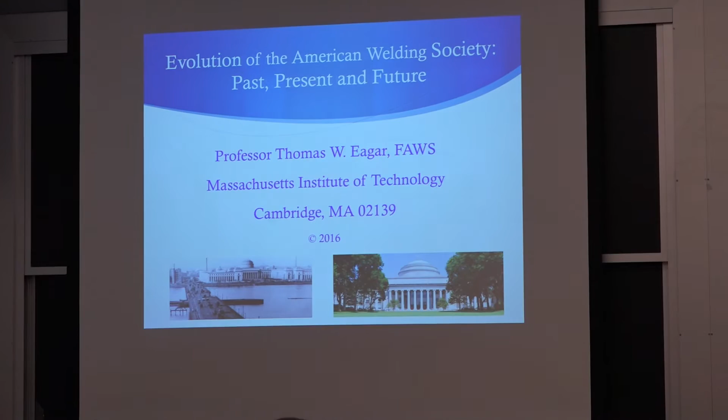why joining is important. So it turns out I'm at MIT, and this is MIT today. This is just about exactly 100 years ago. We're sitting over here in this little building. MIT moved across the river into Cambridge from Boston 100 years ago last month.

So it turns out if we look at welding, welding is a foundation to all the manufacturing that we do, all the products, whether it's micro components or huge ships or other things. It's important to our security, and it's also important to our comfort.

If we look at needs of different people - well, before I do that, this is the outline of what I'm going to go through. I often use the U.S. Army's approach when they're teaching new recruits: first you tell them what you're going to tell them, then you tell them, and then at the end you tell them what you told them. Because they hear it 3 times, and then maybe they'll learn it the 3rd time.

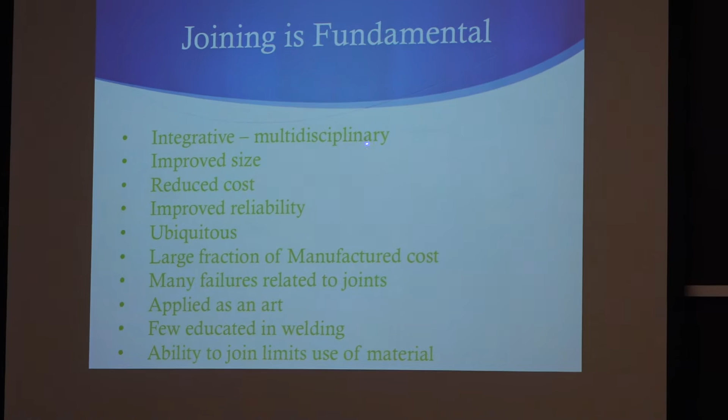Anyway, joining is fundamental. It's an integrative process that's multidisciplinary, using lots of different engineering fields of study. It's improved the size, reduced the cost, and improved the reliability of virtually everything we build.

It's found everywhere, it's ubiquitous. It's a very large fraction of the manufactured cost, which is one of the reasons it's important to our manufactured product. It's important to the quality of what we build. Many of the failures are related to the joints.

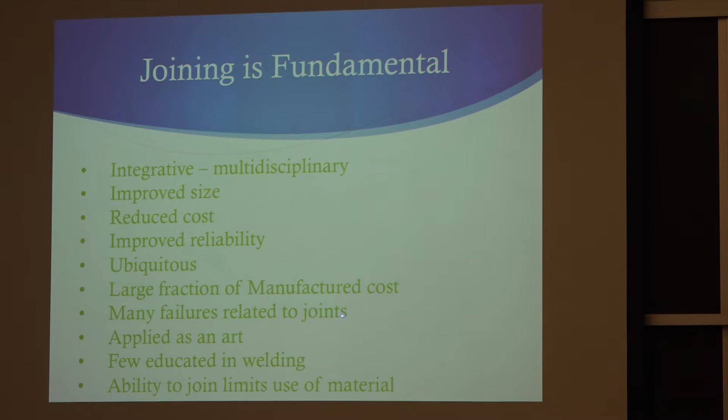It's often, almost always, first been applied as an art before we ever understood the science behind it. The science tends to follow the art in welding because of the great need to be able to join things. There are relatively few people in this country educated in welding.

We probably turn out 50 welding engineers a year in this country. In the Soviet Union, or former Soviet Union, they turn out about 5,000, okay? And you can actually see the difference in the way they do things in different countries because of the difference in the number of people who are actually educated in welding.

And the ability to join something, particularly new advanced materials, often limits the use of materials.

Now, one of the reasons we're doing things in general is because we're trying to fulfill some need, and it turns out the guy Maslow came up with a list of needs, a hierarchy of needs, a number of years ago, and joining is important because it fulfills some of our needs. So there are basic needs, which are the physiological needs of food, shelter, clothing, and safety, and then your psychological needs of esteem, love and belonging. And then there's the self-fulfillment needs where you actually can start worrying about the environment and all kinds of other things.

I remember once we had the World Economic Forum here at MIT, and I was chairing a session on the environment. And I had someone there who was Minister for the Environment - this was like 1992 or so - Minister of the Environment for the former Soviet Union.

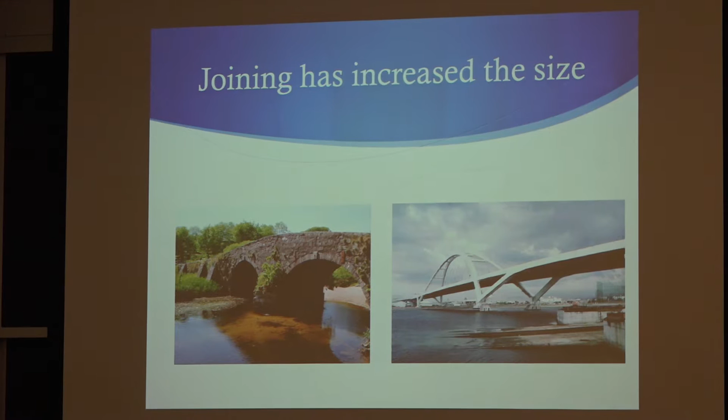Joining has increased the size of what we build. Here's an old bridge, I think in England, an old stone bridge, and you could go across small bodies of water. But today we have huge bridges, and it'd be hard to imagine how we would build something of that size without modern joining technology.

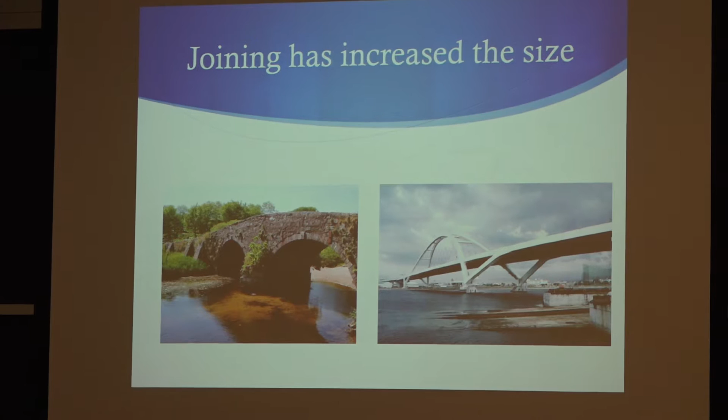What I really should have done is put together a picture of a pressure vessel. If you think of pressure vessels that now are 4 inches thick, can you imagine riveting a pressure vessel like that, 4 inches thick, with rivets? It would be nothing but overlaps, right? So because we have welding, we can make things that 100 years ago we couldn't make.

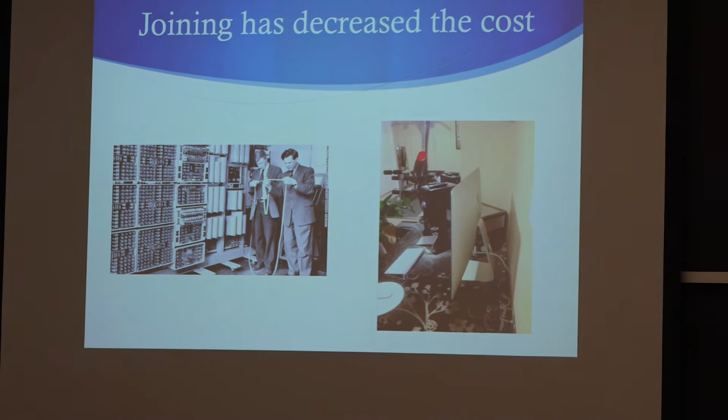It's decreased the cost of things, and so I'm using here a computer. Here's one of the old computers versus a new computer. What's going on there? Well, that's interesting. PowerPoint, Bill Gates knows what I want to do, I guess.

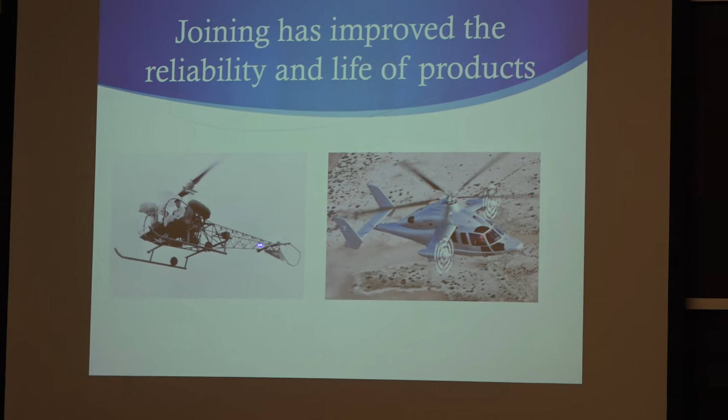Anyway, it's also improved the reliability and life of products. There's one of the early 1950s helicopters, a Bell helicopter. It's basically a very simple design, very light. It carries about 1 person, not much more. Actually, during the Korean War, it would carry 2 people, they'd have a stretcher hanging off the side. You may have seen that in MASH or something.

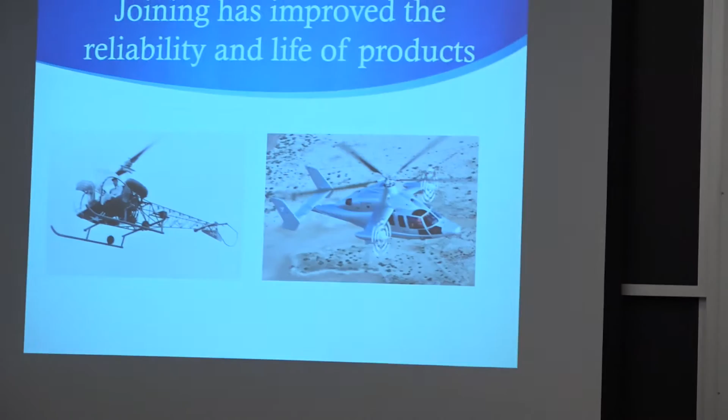Here's a modern Eurocopter that goes at like 230 miles an hour. And of course, we have the V-22 Osprey, which can go 300 miles an hour when you tilt the rotors forward. Does anybody know why helicopters are limited in speed? Because of the Mach drag caused by the advancement of the blade. Exactly. You don't want to go supersonic because you get forces that rip things apart. The advancing blade tip is actually getting to sonic velocity, and that limits your speed.

If you go down to Hampton, Virginia, to the NASA site, they have a picture of a helicopter that they put a jet engine on, basically a rocket engine, and forced it to go, with the tip speed going around, it would have to go supersonic, just to try it out. And some pilot who didn't really care about whether he lived or died flew it. Was it a jet pilot? Probably yes. I mean, well, those guys didn't care anyway.

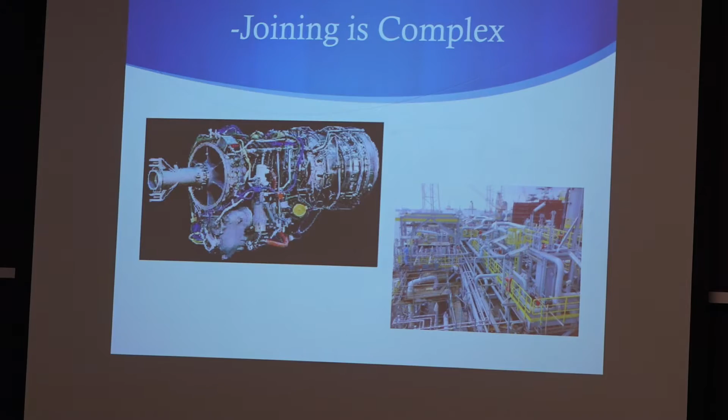Joining is also complex. This is actually the V-22 Osprey engine and drive shaft. It's pretty complex. I remember the first time I ever saw a V-22 Osprey, and I looked under the nacelle to see the engine. I said, wow, I've never seen anything that complex except the inside of a nuclear sub, in terms of everything going in every direction and crisscrossing. And this doesn't even show it fully—if you put it inside the nacelle with all the other things, it's even more complex than this.

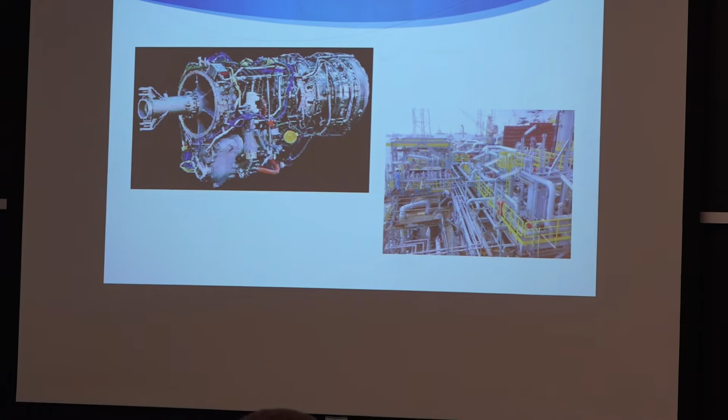It's fundamental to our manufacturing. It's foundational to what we do.

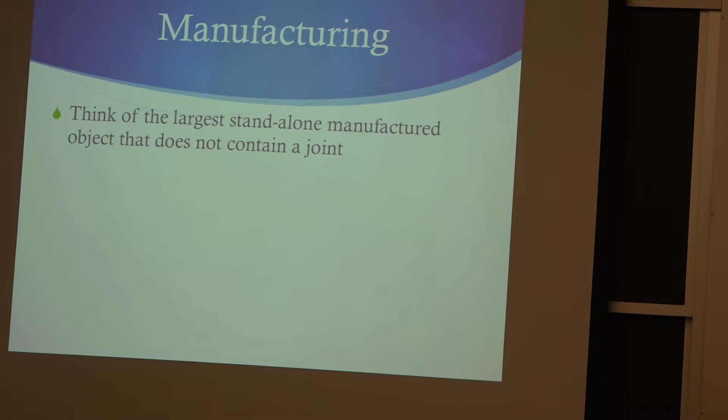In terms of manufacturing, I often, for many years, have asked students and others to think of the largest standalone object that does not contain a joint. So anybody have an idea?

I mean, people would say a nail or a needle. That's not very large, okay? I've gotten milk cartons, but even a milk carton's got to have a top, right? Maybe length of asphalt road. Except the asphalt road is actually a composite, so it's full of joints—you've got your aggregate and your asphalt, and those things have to stick together.

Ship propeller—if it's cast, yes, that's actually pretty good. Oh, an anchor? Yeah, an anchor. Although to make the whole thing functional, you've got to have it connected to a chain and things. I gave this challenge once to some faculty, and one came up with an anvil. But your ship propeller is pretty good in terms of a standalone object—I'd say it beats the anvil in many ways.

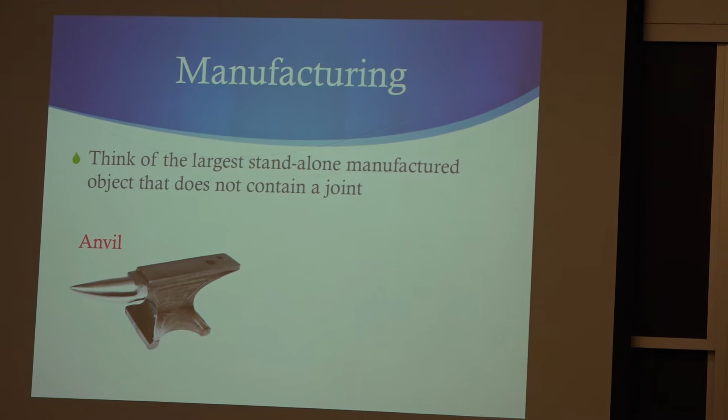That was Frank McClintock, who's retired now but was a faculty member of mechanical engineering. I mentioned this once to a bunch of faculty, and Frank fretted about this for like three days—what was the largest? Well, it turns out the largest depends on how you define it, but I call it a standalone object.

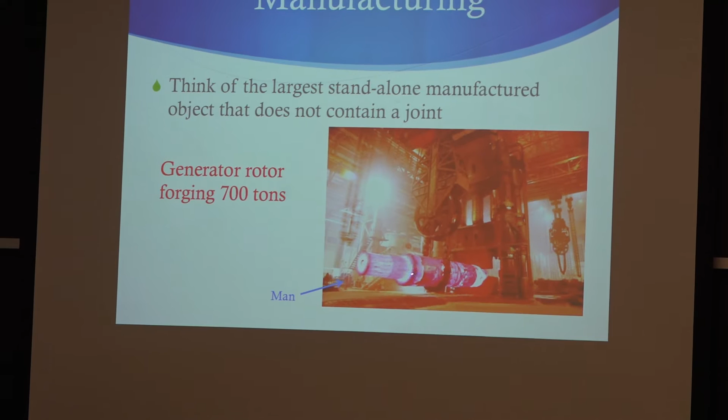The largest manufactured object that I can think of is a generator rotor forging, and it weighs about 700 tons. The forging gets machined down into a big long thing that will generate 1,000 megawatts of electric power. There's a man right there—so this is a lot taller than a man. It's about 10 or 12 feet tall and weighs 700 tons.

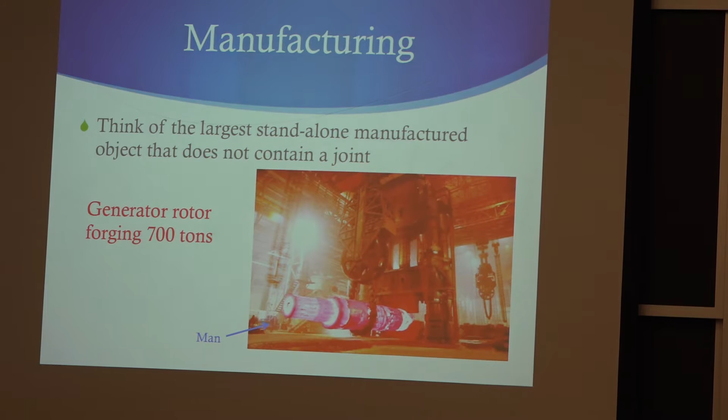But it's really just a big paperweight, unless—like your anchor, that was a good one—it's standalone, like the anvil, in the sense that you don't really need anything else to go with it. And the propeller's pretty good too. I actually came up with the largest in weight that I know of, which is an ingot mold for the generator rotor. It weighs almost the same amount as the generator rotor itself.

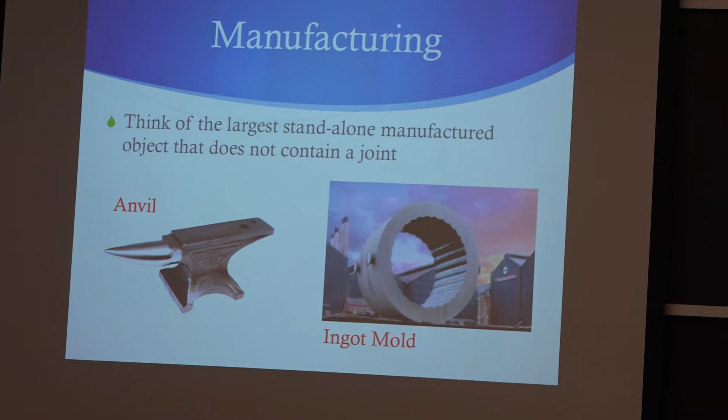By the way, when I was a young engineer at Bethlehem Steel 40 years ago, I was given the job of trying to weld two big forgings together because there was limited capacity in the world to make these great big generator rotor forgings. They'd like to make them even bigger if they could, but at the time they were estimating it would cost $1 billion to build a new facility to cast, heat treat, forge, and machine these rotor forgings.

It turns out Bethlehem Steel could turn out one a month, and U.S. Steel had a facility that could also turn out one a month. So we had the capacity to make 24 of these in the United States, and I think the French had a plant that could make another one. But you could only make so many, and people were projecting—this is the mid-70s—that electricity usage was going to outstrip all this, so we had to figure out how to get more generator rotor forgings without investing $1 billion in a new production facility.

So I was asked how you weld something with a cross section of about six feet by six feet—two big long objects with a cross section of about 36 square feet or so. Obviously I wasn't going to be able to do a whole lot of test welds because they get kind of pricey at that size. But in any case, where was I going with that?

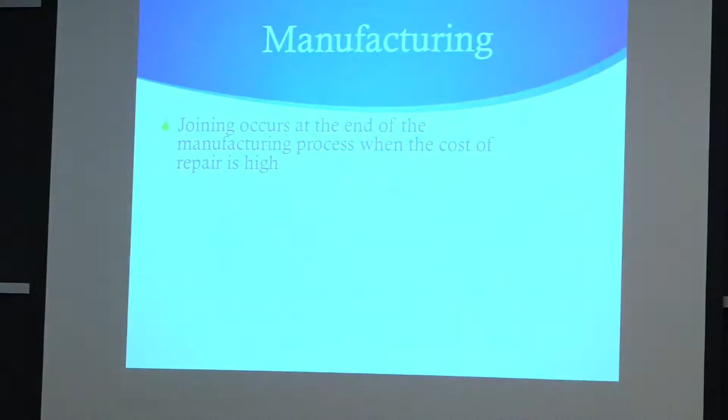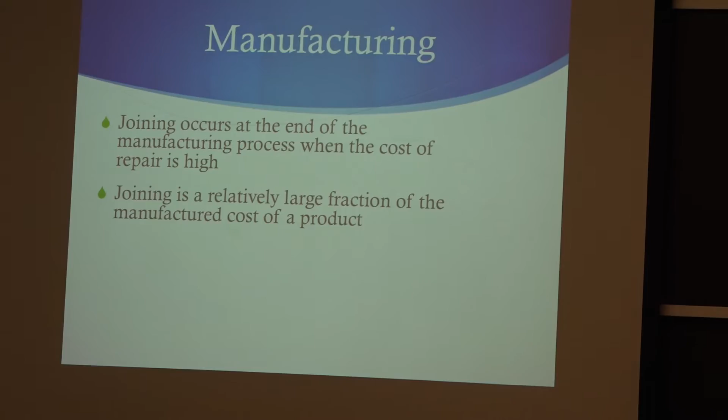Joining occurs at the end of the manufacturing process, where the cost of repair is high. Joining is also a relatively large fraction of our manufactured cost—typically 10 to 20% of the cost of a manufactured product. People say, well, that's only 10 or 20%, but the material cost is usually much less than 10%. So joining is actually a larger fraction than the actual cost of the material in most cases.

The inspection cost is about similar to the joining cost. If you take my course on material selection, I go through some of these things. It's actually in the handout you have on 21st century research needs—it breaks down what the fractions of manufactured cost typically are for something.

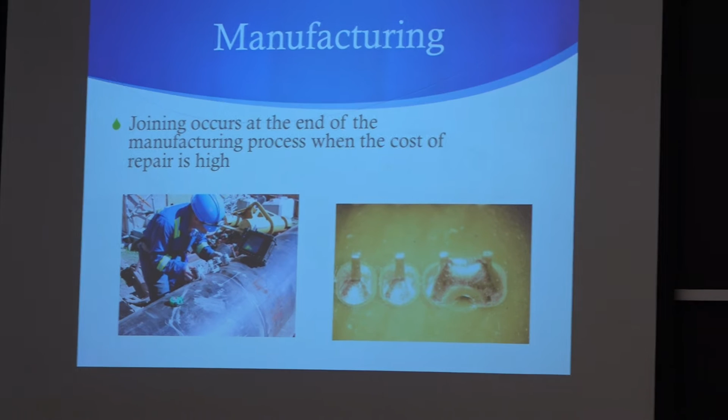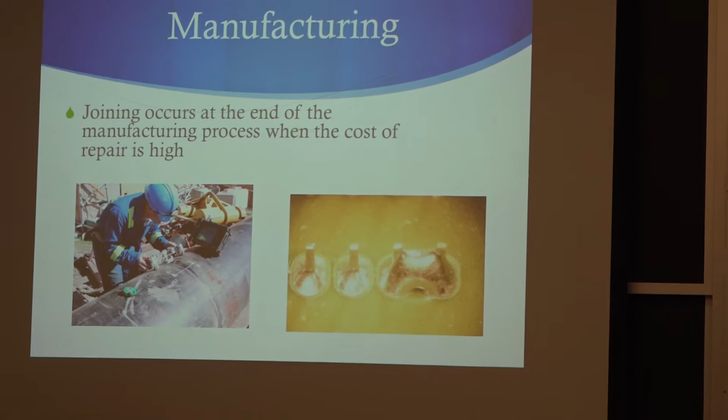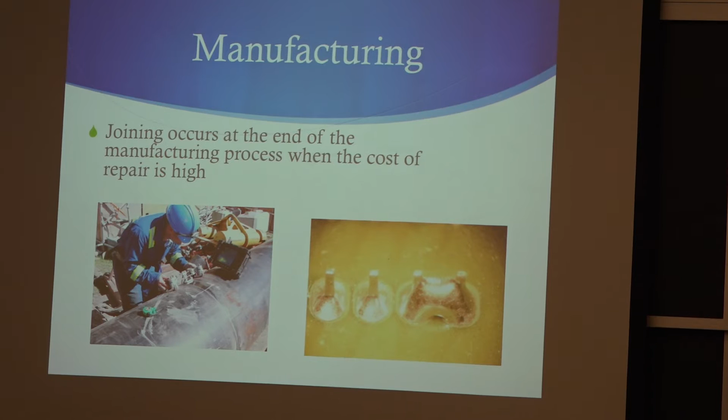So joining occurs at the end of the manufacturing process. We're talking about a big pipeline—we've already made the pipe, dug the hole, put it in there, someone's welded it, and someone comes along and inspects it. If it doesn't pass inspection, your whole project is delayed, and you're talking about a million dollars a day in delay time. If you're looking at a printed circuit board with solder joints, one bad solder joint out of 10,000 joints can destroy the whole project, and you've got to go in there and fix it individually. So rework is often a problem.

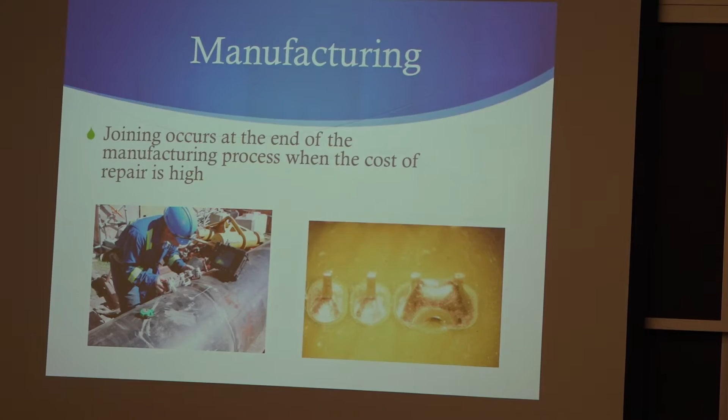Now, it's actually easier to do it right the first time. I have two examples I've run across in my career of learning to do it right the first time.

You've all seen people who have pagers. Nowadays we all have cell phones, but before that a lot of people carried around a pager—doctors still do to a certain extent. Back 25 or 30 years ago, pagers were one-of-a-kind type of products because they had to have a separate frequency for each pager. Motorola had moved manufacturing to Singapore, and if you went into a Motorola store and ordered a pager, it would take 6 weeks to receive it. Motorola decided they could move the manufacturing back to Boynton Beach, Florida.

They moved it back to the United States because this was 25 years ago—to Boynton Beach—because they could get the delay time from 6 weeks down to about 3 or 4 days. From the time you ordered it, you'd be able to come pick it up 3 or 4 days later. Nowadays you get things instantly, but people were trying to shorten the manufacturing time. The manager setting up that plant was going to make it very automated—almost no people, lots of robots putting this together.

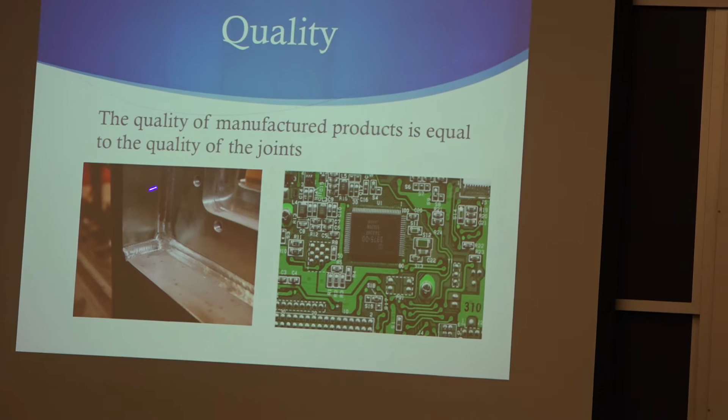Joining is fundamental to the quality of our manufactured products, and the quality of the overall product, whether it's a glove box—this is a glove box for reprocessing plutonium, nice welds—or a printed circuit board, the quality has to be uniform and good.

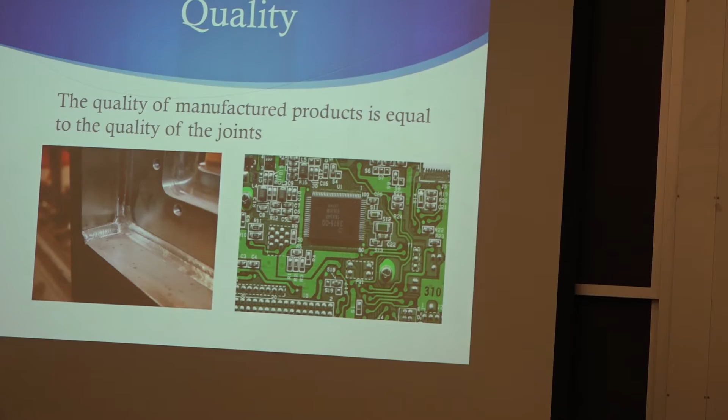Now, when I first started teaching here 40 years ago and had selected joining as one of my areas, we had a faculty member here. He passed away recently, but he was teaching fracture, and I heard from some of my students that in his fracture class he would say that something won't fail unless it's been welded. That was Professor Regis Pelloux.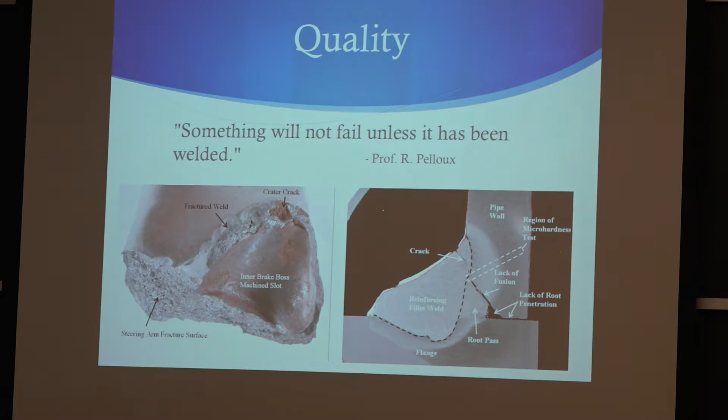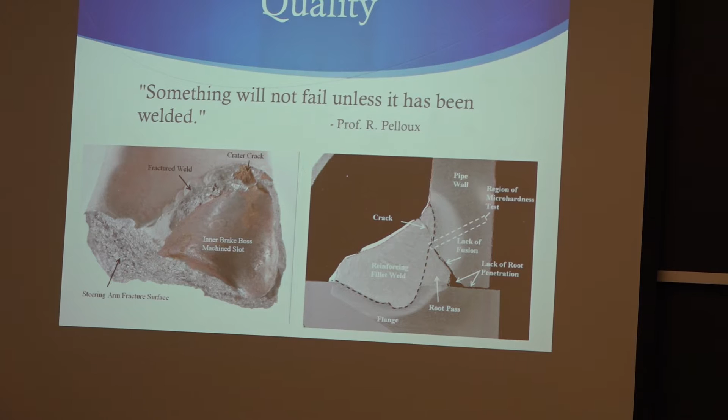He was from France, came here and did a PhD in this department, went off to Boeing doing fracture, then came back here as a faculty member. When I heard that from my students, I thought, oh—then within a second or two I said, well no, that's actually good. As long as they keep failing, I've got a job. And I have had a job for the last 40 years because joints fail.

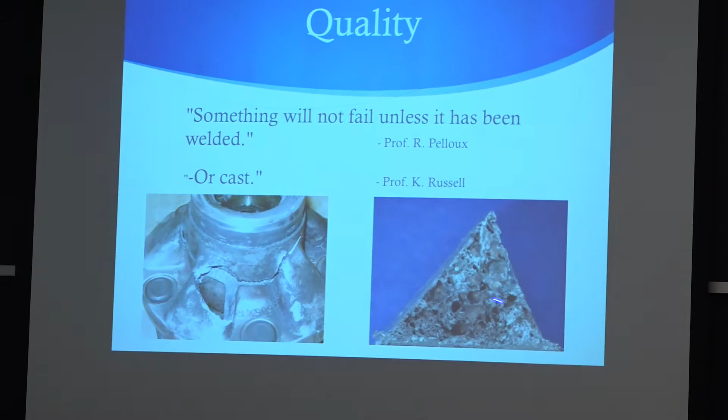But I want to talk about why they fail. This became a fairly common phrase around here—something won't fail unless it's been welded. And Professor Russell said, or cast. Castings also fail. There's a bunch of porosity in this casting, and here's a casting that cracked. Castings and welds, in some cases for similar reasons, are likely to fail.

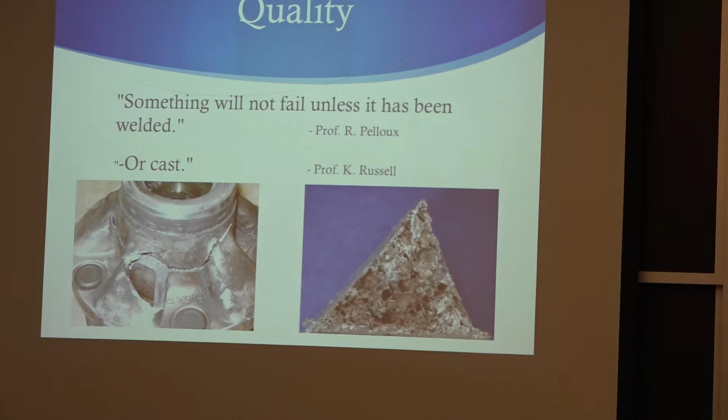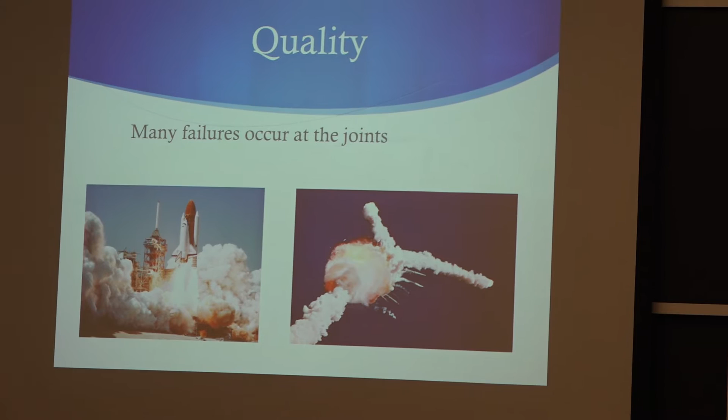I remember when the Space Shuttle Challenger blew up, some of my students—I went into the student office for something—they said, did you hear? The Space Shuttle just blew up. And I said, I bet it failed at a joint. I think I said, I bet it failed at a weld. I'd been here about 10 years at the time. I was wrong—it didn't fail at a weld, it failed at a joint, an O-ring joint.

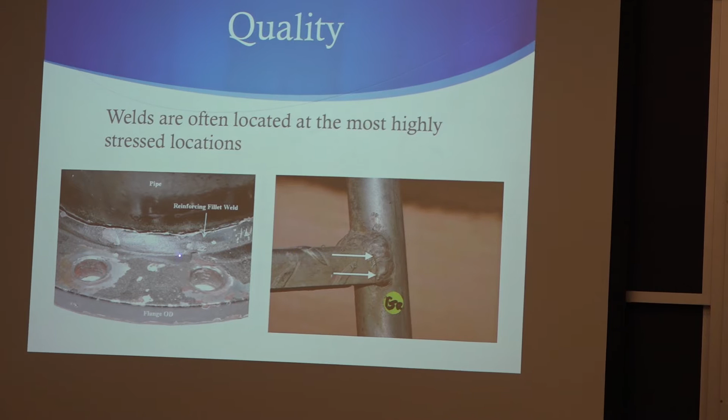The reason things fail at the joints is because they're usually the most highly stressed locations. We tend to put them at the corners or at the intersections. It's not that the welds are inherently bad.

In fact, in steel, the welds are actually some of the strongest material. We've actually tried in some cases to make structures completely out of weld metal because the weld metal has better properties. We can get better properties in the weld than in the bulk of the material, because each weld is a small little casting, and that small casting can have better properties than the great big casting that they make the plate from. So welds have progressed in quality quite a ways, but there's still a lot to be said.

We tend to use larger safety factors. Look at the structural welding code for bridges and buildings—the safety factor on static stress is 1.67, five-thirds. For welds, it's double that. We assume there are going to be defects. It's done manually, it's done by people who had a bad night, or as we know in some cases, are on drugs or whatever.

In fact, has any of you spent time at Electric Boat? Have you ever looked at the—there used to be a parking lot, parking garage right across from the main gate—what's that look like at lunchtime?

Sleeping in the cars, well, I used to see an awful lot of... well, they weren't sleeping in the cars, they had a lot of motorcycles. It looked like a hippie convention, okay? But these are the guys that were building the ships another half hour later and a half hour before. You kind of look there and say, oh, okay, they didn't look like your number one technicians. And they actually did a very good job, but they had to have a lot of supervision. So anyway, there are some problems.

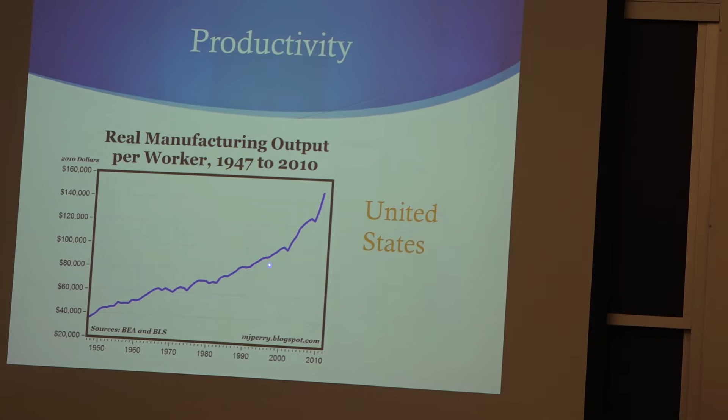I remember back in the mid-'90s when it was around $100,000, I had a student working at Boeing in the door product center. This was a very interesting manufacturing operation where they build the doors—you know, you walk through the door to get on a Boeing 737 or 747, they build that door. It's an interesting process because it might take 3 years back then to build the aircraft. You get the order, you lay the keel—they call them ships because they actually have keel beams—and then they build the fuselage around that keel beam, a great big aluminum I-beam basically at the bottom of the ship.

It only takes about a year to build the door, so it was deterministic—you knew exactly how much product you had to produce because they started the ship 3 years before, and you only had a 1 year lead time, so you knew exactly how many doors you had to produce. They had 250 employees. I asked, how many doors do you build each year? 750. I said, what's the door cost? They said, oh, we don't know, because it was all an internal transfer within Boeing—they didn't sell them outside. The guy says, I don't know. I said, well, I think I know. If you've got 250 people making 750 doors, that means each person should be producing at least about $100,000 in the aerospace industry—I gave them a little more credit for being a little more productive, at $150,000 per person. So if each person produces about 3 doors, they've got to be $50,000 doors.

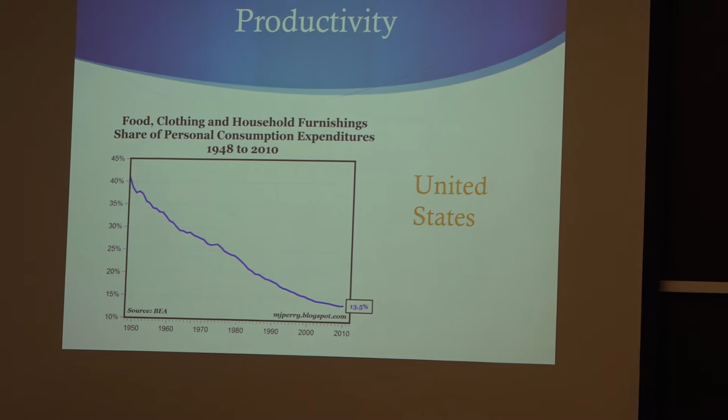Does anybody know why, if we were the most productive, we were losing in the balance of trade and everything else? Pardon me? Quality? No. Well, quality was why we were not making all of it, but productivity is not the same thing as competitiveness, okay? I've got a story about that too.

But productivity is how much a worker can produce. If you took one of my courses, maybe I cover it in one of the welding modules when I talk about steels. For example, if you go back, how many years ago? 350 years ago, when they started Saugus Iron Works. Saugus Iron Works was the first ironworks in the United States. It's right up here in Saugus, Massachusetts.

You're looking for a free trip to see something you can see. It's a national historical park. You can see the first ironworks, okay, in the United States. And there's an interesting story behind that about why they started building ironworks and glassworks in North America.

Turns out they had an energy crisis. They were running out of firewood in England, literally, okay? So that's part of one of the other lectures. But in any case, they had lots of forests over here, so they built an ironworks in Saugus. I've estimated it was probably about 4,000 to 6,000 person hours per ton of iron produced, because you had to cut the trees, turn it into charcoal, dig the ore. You did all that and you just didn't produce that much.

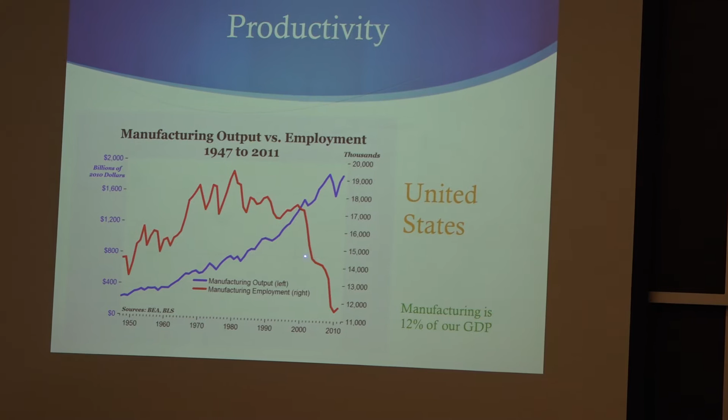You can see that manufacturing employment has taken a big nosedive. About this time, I testified before Congress about manufacturing jobs and productivity in the United States, and I was basically predicting this. Now, this is a scale that doesn't go to zero, but it's dropped by a third in just the last 10 or 12 years.

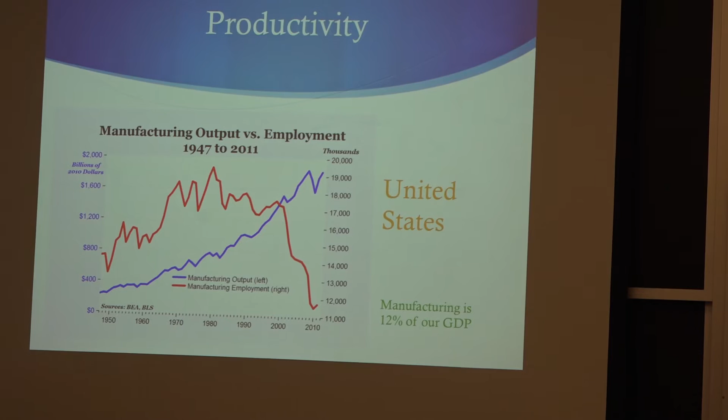So employment is going down. If you hear my story on steel in the 1980s, everybody was maligning the steel industry, but it was actually because productivity was going up in the steel industry. In the decade of the 1980s, productivity in the steel industry in the United States doubled, but our consumption stayed the same. So guess what happened to employment? It went from 500,000 employees to 250,000 employees in the steel industry.

And Wall Street says, oh, steel is dead. I don't think it's quite dead. I'll talk about that in some other lectures.

But anyway, joining is often applied as an art before the science is known. Pressure welding, which is like forging, forge welding, is a type of mechanical energy. Electric arcs are electrical energy. Resistance, which actually came before arc welding, is also electrical. Oxy-fuel is chemical energy.

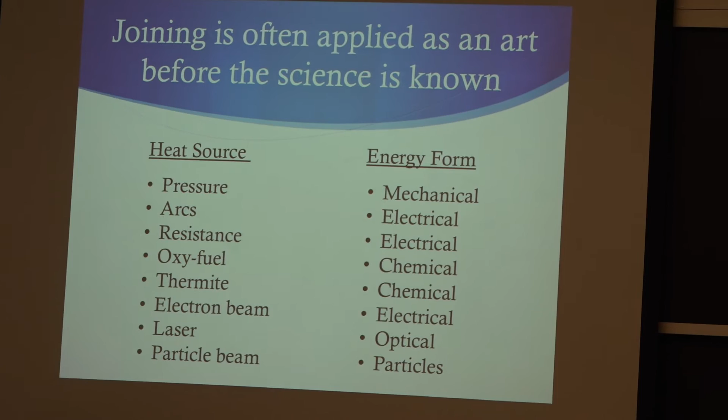Thermite welding, which we'll talk about later in the course, is a chemical form. Electron beams, we had them in the 1930s, but before we started doing anything practical with them in the 1950s. One of the first things we were doing, aside from melting metals, was welding them. Laser, within the first year or two of inventing the laser, they were using them to repair vacuum tubes by welding them.

Particle beams, I was involved in 1992. Peace was breaking out with the former Soviet Union under the Star Wars initiative with Reagan. The naval warfare, well, they don't call it the Naval Warfare Center anymore, but it was basically White Oak, Maryland.

What do they call it now? The Naval something, warfare sounds too aggressive nowadays. But anyway, no, not Carderock, this is White Oak. Carderock's the NAVC lab. White Oak is someone else's lab, another part of the Navy.

I can't remember. But anyway, they had spent $250 million on developing particle beam weapons. And the idea, because they started this not too many years after the British destroyer, the Sheffield, got hit by an Exocet missile in the Falklands Islands War, they lost the Sheffield, a whole major capital ship, because of one Exocet missile.

The Navy was concerned about small missiles coming in and wiping out a ship. There's debate about why the Sheffield's superstructure caught fire, but the Exocet certainly ignited it. Anyway, they decided they're going to develop particle beam weapons.

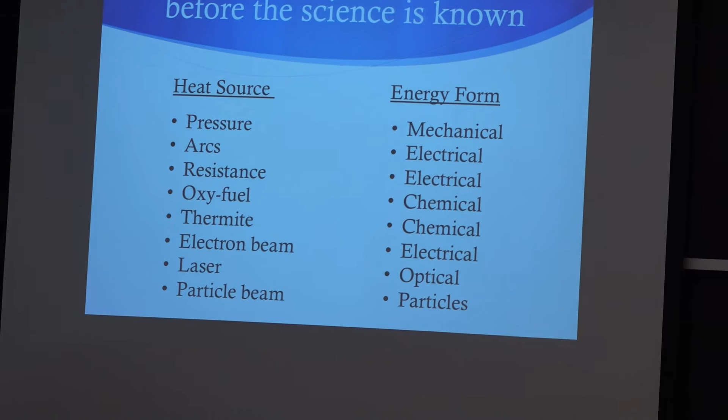When they told me about it and all the power these things had, I said, well, you might be able to melt a submarine, but you don't need more than 10 kilowatts to weld. So when they first started developing particle beams, one of the things they were looking at was trying to weld with them. As soon as a new form of energy comes along, we tend to use it to try to weld.

There are relatively few people trained in welding. Here's a welding school from an old picture.

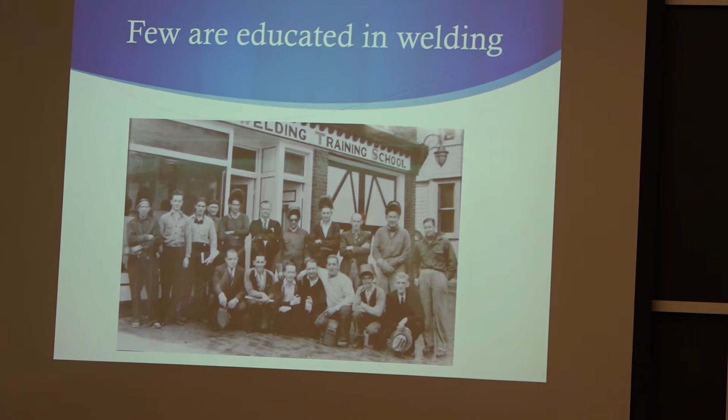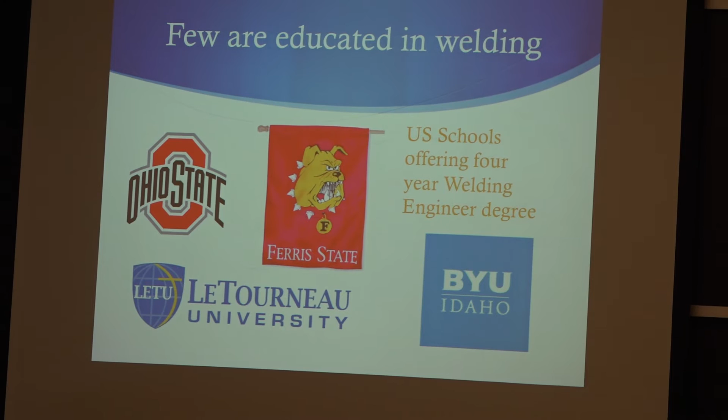Today, I mentioned in the United States we don't educate that many graduate 4-year engineering degrees in welding. There are 4 schools. The big one's Ohio State. People are familiar with welding engineers coming out of the welding engineering department. LeTourneau down in southern Louisiana, Texas, actually in Texas I think. Ferris State of Michigan and BYU Idaho are the only other schools I could find that have 4-year welding engineer programs.

For example, at the shipyard, the welding engineer code's entire office is painted silver and red, and it's all Ohio State grads. Right, a guy from there or something.

Ohio State produces about 30 or 40 welding engineers a year, and they only produce about 50 in the country total. These other programs produce just a few engineers a year. It's mostly Ohio State—when you say graduate welding engineer in the United States, most people think of Ohio State. But there are 3 other schools, so far as that goes.

I remember, he's passed away, but Jim Cameron, who was head of welding at Electric Boat for many years, used to describe Ohio State grads as neither fish nor fowl. But we don't have to go there, particularly since this is going to be broadcast to the American Welding Society, many of whom are going to be Ohio State grads.

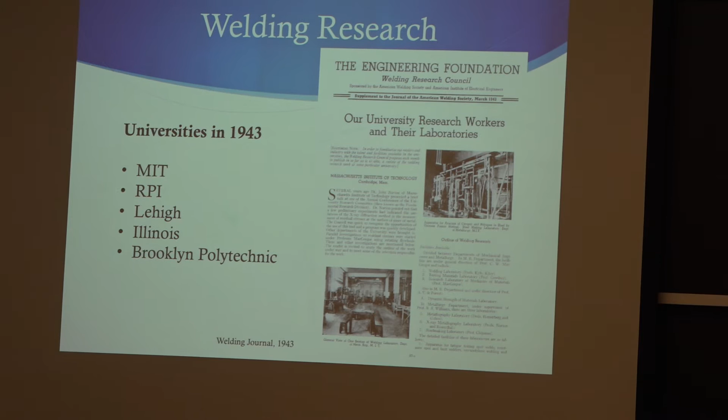Anyway, if you go back historically, it turns out in 1943, in the middle of World War II, the Welding Research Council basically ran a series of articles on the universities doing welding research. The first one was MIT. If you read the whole thing, I actually posted this on the hallway across the way.

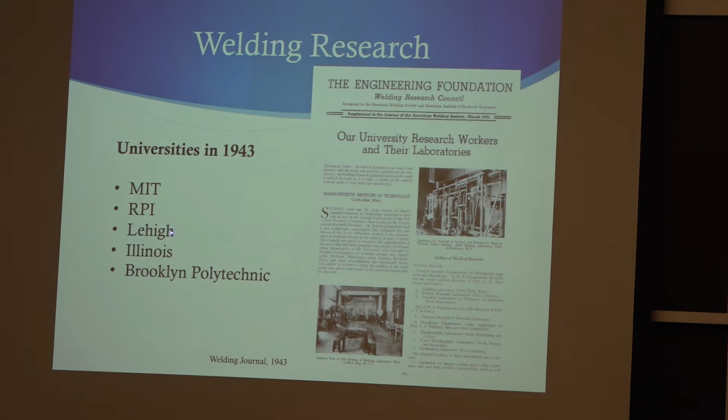Rensselaer Polytechnic, for many years, had a welding program; about 2 or 3 years ago it sort of became defunct. Lehigh University has had a welding program since the 1930s, and it's still going strong under Professor DuPont. Illinois had a welding program, but I haven't really seen them in welding in my career. Brooklyn Poly, I haven't seen them active in my career either. But those were the schools back in 1943.

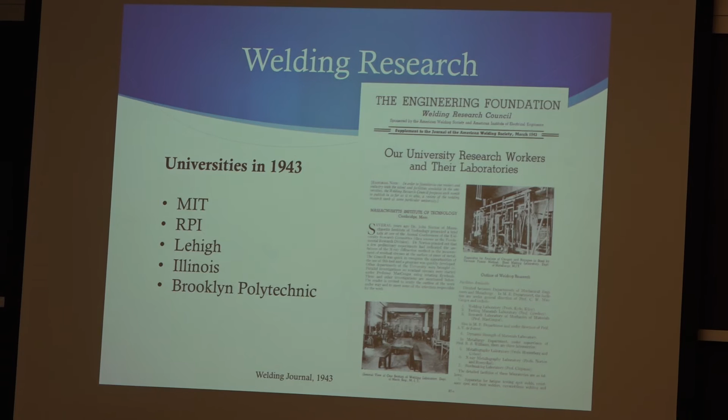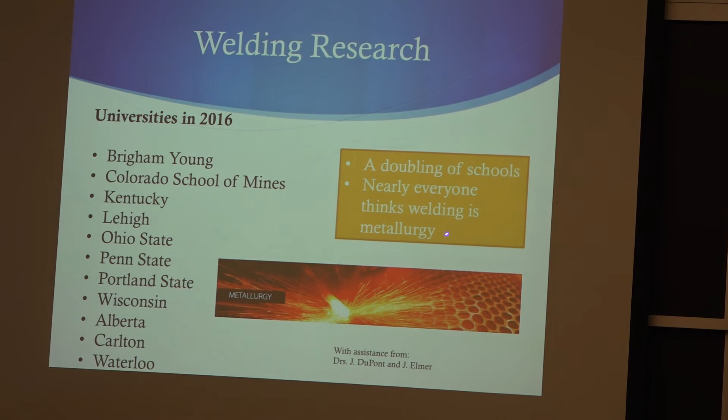One of the problems, going back to Lehigh, is that the metallurgy was kind of where the welding focused. Ohio State's broader—they didn't start their program until about 1948, and they actually cover more of the disciplines.

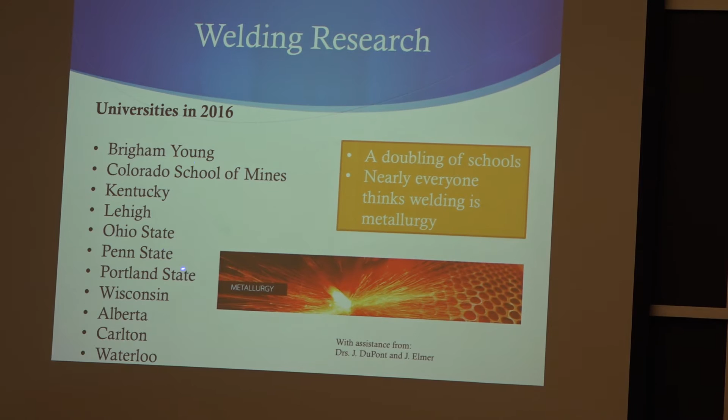Most of these, welding and metallurgy are synonymous, okay? And actually, John DuPont and John Elmer helped me compile these.

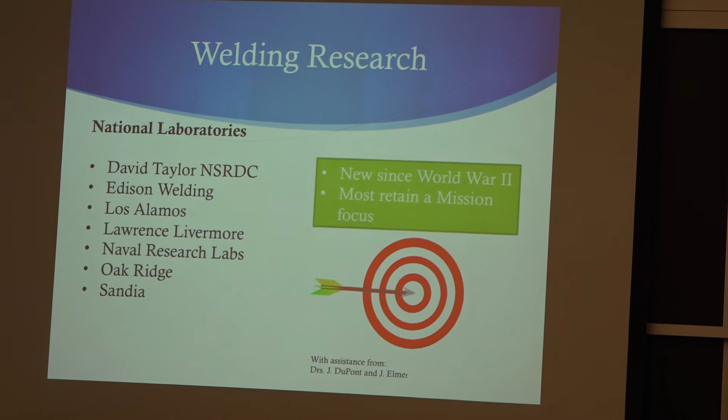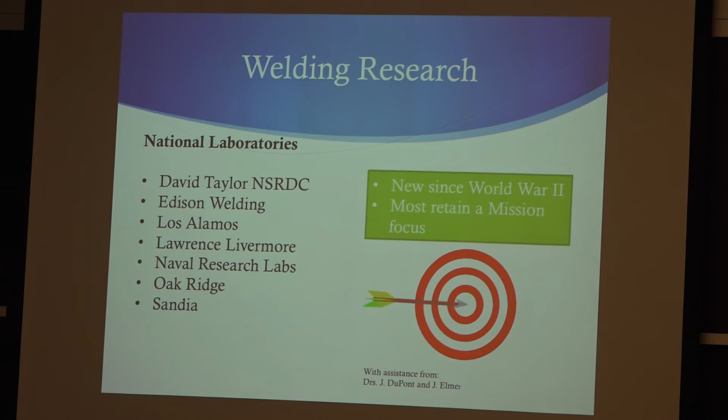Now, we also today have national laboratories, and national laboratories doing welding research include David Taylor. This is Carderock, okay? Used to be Annapolis and Carderock. In fact, the Annapolis detachment, as they called it for many years, was actually where the welding was done. And then, in the base realignment and closings, they closed Annapolis and moved it to Carderock. But anyway, NSRDC, that's the Navy welding laboratory.

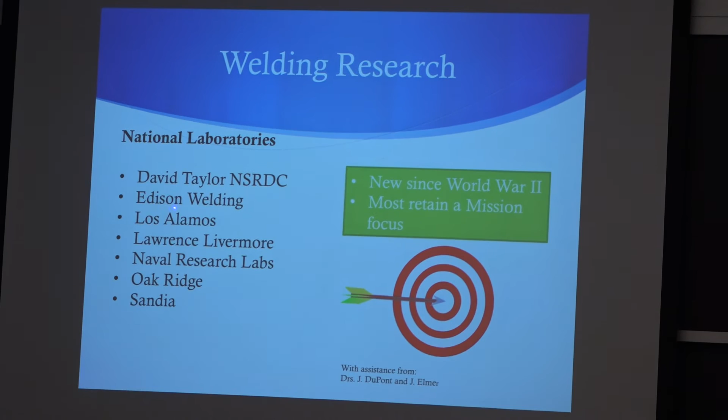Edison Welding Institute is the only one run by a state. The state of Ohio basically put a bunch of money in, about $10 million a year, to get it started back in the mid-'80s.

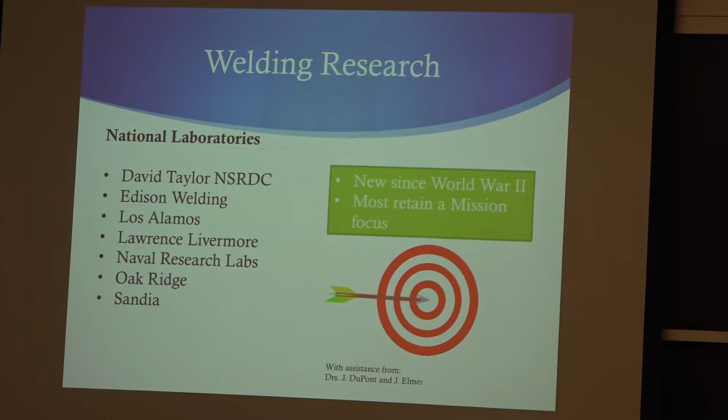Los Alamos National Lab, of course, they focus on nuclear weapons. Lawrence Livermore, competitor, but also nuclear weapons. Excellent work done at those, but a lot of it doesn't see the light of day, at least hopefully. The Naval Research Labs, that's the Office of Naval Research Welding Laboratory, or Research Laboratory, and they're not doing as much anymore, but they still have a little going on.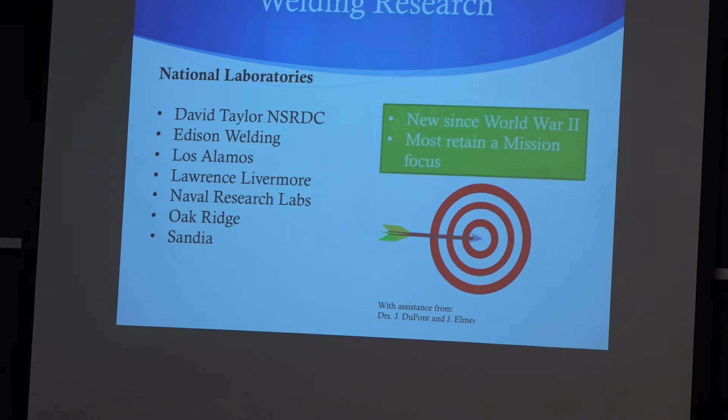Oak Ridge National Lab, the Department of Energy. And Sandia, there's one in Livermore and one in Albuquerque. They basically are part of the nuclear weapons complex. Most of them still retain a mission focus. There used to be some others like Idaho National Engineering Lab, but over the last few years they've sort of stopped doing much on welding.

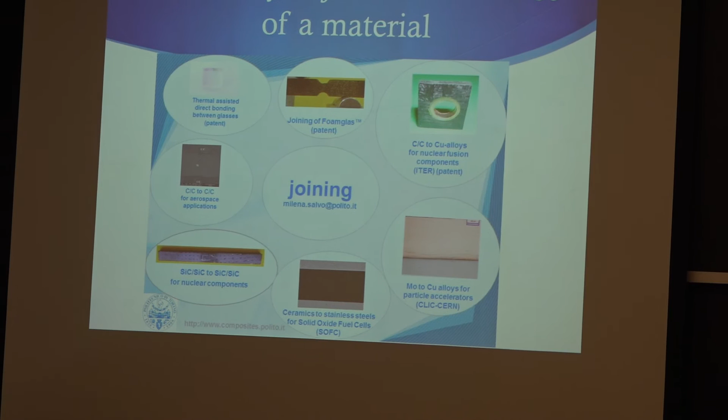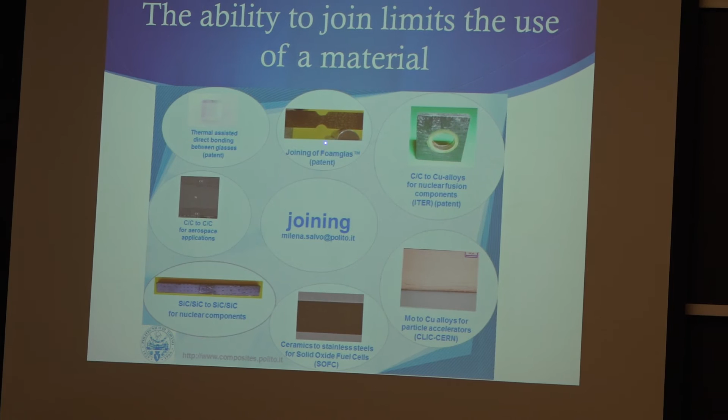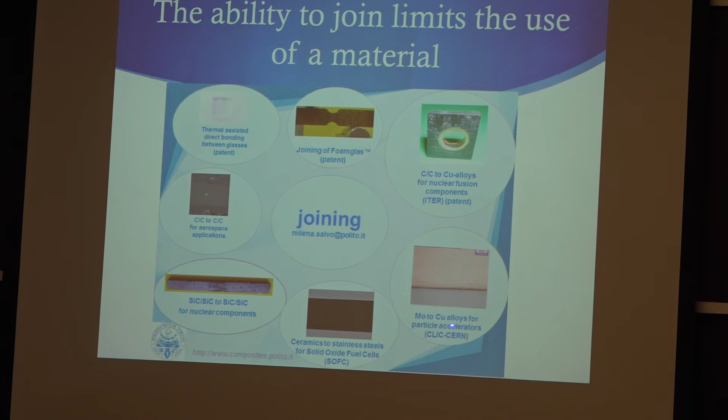The ability to join a material limits the usefulness of the material. This is a slide from a place in Italy, where they talk about joining of advanced materials, okay? This is joining of glasses, joining of a Foamglas material. Carbon-carbon composites to copper alloys. Here we've got molybdenum to copper for particle accelerators.

That's an interesting application, because the first place I ran into it was in the Aegis missile system, up here at Varian. They were trying to weld molybdenum to copper because they have something called the cross-field amplifier for the microwave, the phased array radar system, and they pulse an electron beam through there. Tremendous heat flux—it would melt the copper. So they put molybdenum, which has a very high melting temperature, and they had to braze the surface of it to the copper.

And they had come up with this—actually I could have brought some, I guess I still have some of the samples. They had originally developed a process that used an 82% gold braze alloy, kind of pricey, okay? But they came up with another one that was only 35% gold. And they said to the Navy, this one's better—we can do a 180-degree bend without it breaking, whereas the other one we could only do about a 15 or 20-degree bend and it would snap.

And the Navy says, oh no, you're just trying to save money, going from 82% gold to 35%. We want the old system. They had already solved the problem, but they brought me in without telling me they had solved the problem. And they said, well, we're trying to bond molybdenum to copper, and we're wondering how you would do it.

And I said, well, what you really need to do is develop a transient liquid phase diffusion process. And they said, what's that? And I explained to them what it was—it's a diffusion bonding process. It starts as a braze and ends up as a nice, perfect joint. And we discussed this, in a room with about 10 engineers and me, for about 45 minutes.

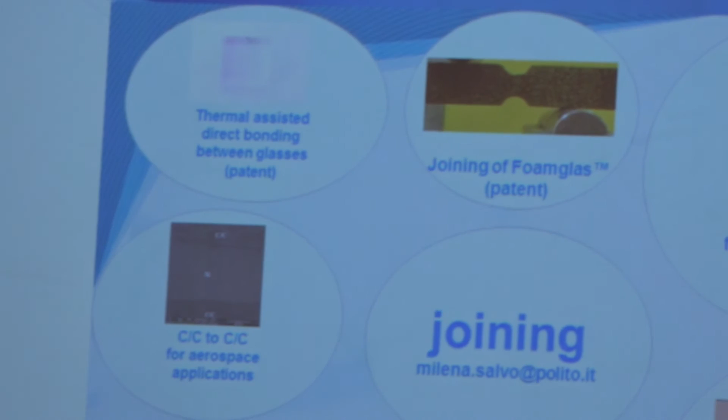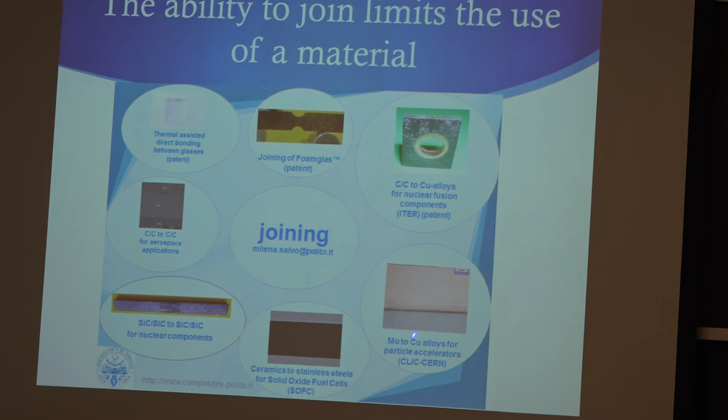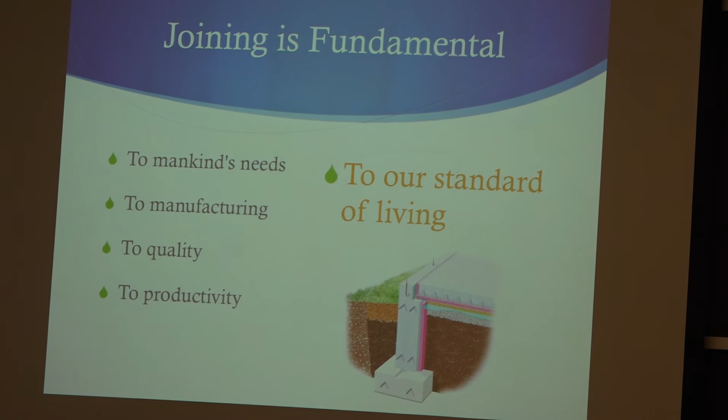Ceramics to stainless steels for solid oxide fuel cells, silicon carbide to silicon carbide, carbon-carbon to carbon composites. If you want to build something out of these new materials, you've got to be able to join them. In many cases, most cases, we can't get 100% joint strength. We could get it here because we only had to match the strength of copper, but most of these materials are too complex for that. So joining is fundamental to our standard of living, and let me show you how things have improved.

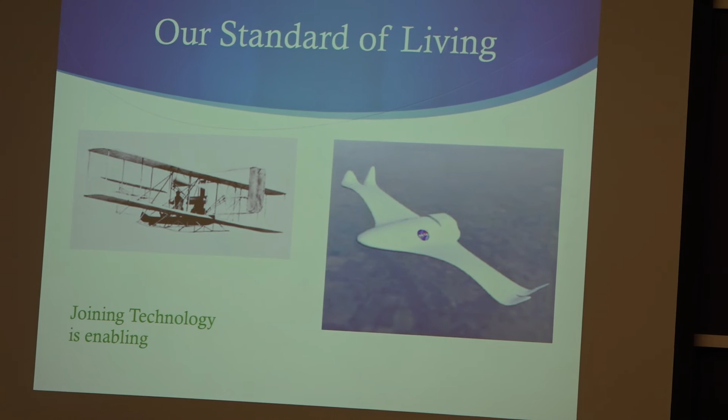If you go to aerospace, joining is enabling. We went from basically the Wright brothers to this NASA experimental aircraft. In the automotive business, we went from...

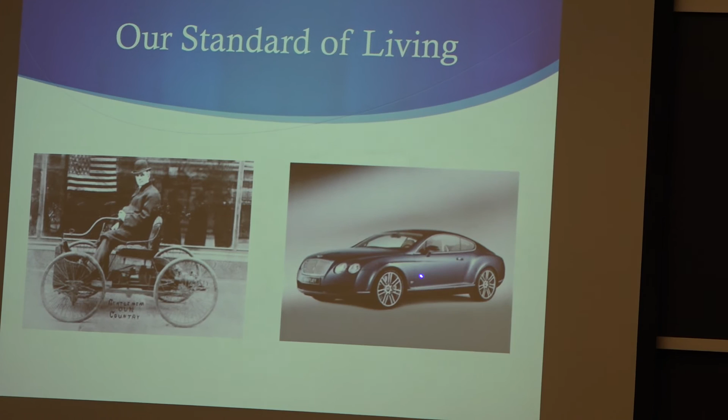This is Henry Ford, I think, in one of his vehicles, there's a Bentley. You can look at all these appliances we have, with critical joining technology in all of them. It's important to our national security.

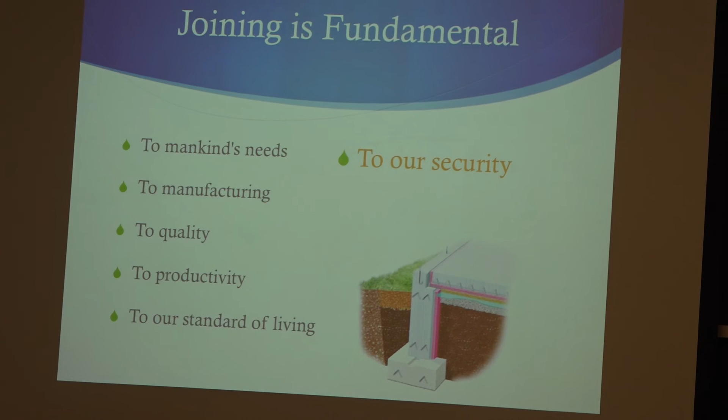Actually, that's another story, and since we have time, I might as well tell it. I used to spend some of the summers down at David Taylor Annapolis when they were doing welding work. At one time we invaded Grenada. They had been waiting because there was a carrier at the Philadelphia Naval Shipyard undergoing repairs, and they delayed the invasion until that carrier was released, because they wanted to have a third carrier defending the East Coast, back in the 80s. So they started the invasion, and about a day in, they had a major problem with the steam system in the carrier left on the East Coast. It had to go into Jacksonville for emergency repairs, leaving the East Coast without a carrier backup, and people were concerned. That's when I learned these guys at David Taylor were having helicopters land on their front yard at 2 a.m. to take them to Jacksonville to fix this problem. So one of the things I've learned is when the Navy needs to move, they can. When they don't need to move, well, that's a different story.

Joining is multidisciplinary. It involves chemistry, physics, mathematics, structural engineering, electrical engineering, mechanical engineering, and materials engineering. One of the problems we face today is most people think welding is metallurgy. It's not, it's all these other things.

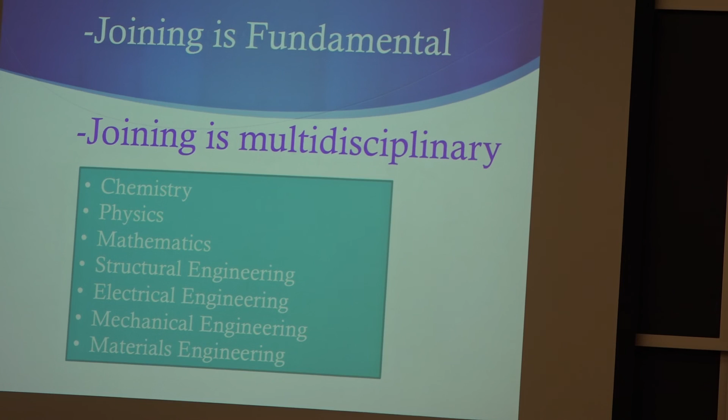Welding is worldwide, and it applies to everyone. One of our goals is to make it faster, cheaper, and safer. Here's someone working on the Empire State Building a few years ago.

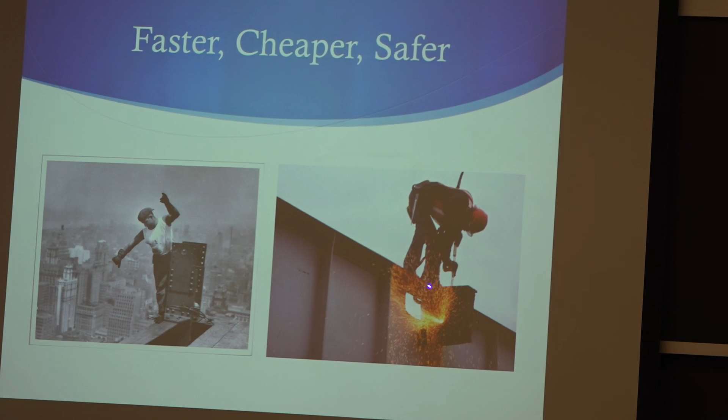No harness, no safety belt, and as far as I can tell - I got this one off the web - maybe that's a safety belt, but I think probably not. I don't know. Standards for how we do things have changed over the years.

So that's my presentation for the Welding Society, the beginning presentation of why welding is important. Tomorrow I will give you a presentation on the prehistory of joining and how far back it goes. Thank you, you can cut it off.